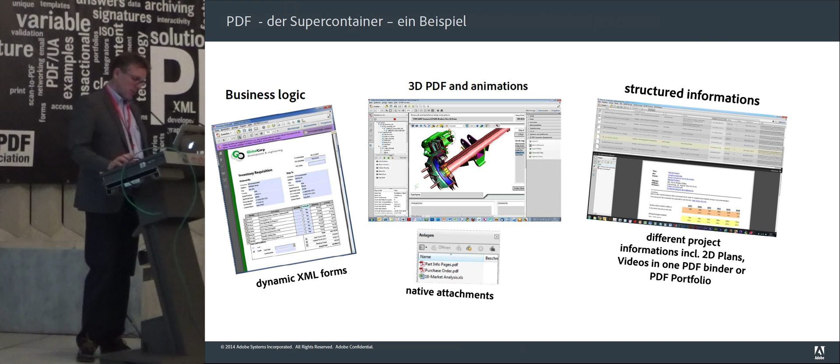So I would like to show you, just as a beginning, this example as a real example. So let me go into my demo file, and there you can see, for example, that this was the wrong viewer. I open that with Acrobat, and there you can see that this is a portfolio, and this portfolio has been created in Outlook. So you can just go down here and you see this email, which was the original email.

Then it includes, of course, it's from me, and it's to Peter Körner, and so on. You can click on that, and it opens automatically the email client. It also includes an attachment, and you can sort this portfolio, which you can see here, like you can do it with Outlook or with Lotus Notes.

You can see where it's from. The file structure is in there. You can see from whom it is, and you can see also that it has some attachments. So for example, there's an attachment which includes an Excel data sheet, and if you double click on that, it automatically has the same Excel sheet that it was when it was an email.

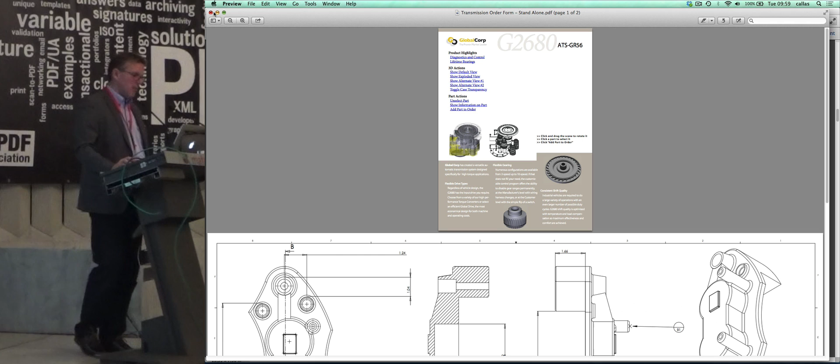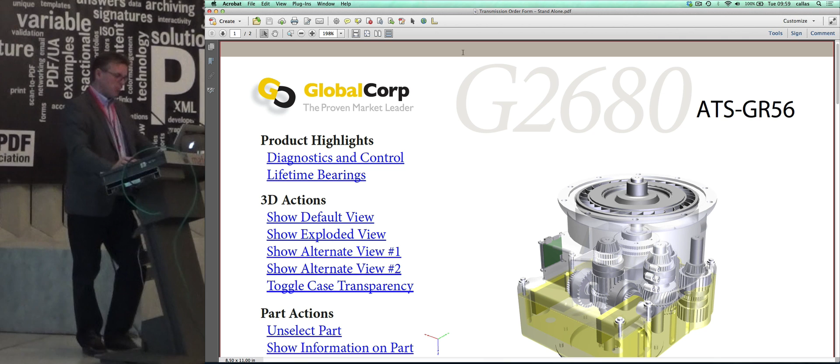The other one, which you can see here on the left side, I can show you as well. So let's go here, and I would like to open that. And this is a file which is one PDF file, and here with preview, I have to open that with Acrobat again. Sorry about that. So you can see that is a 2-page document. It has a 2D drawing, and on the left side it has a 3D picture, and it has a 3D model. So if I click in here, you have the 3D model.

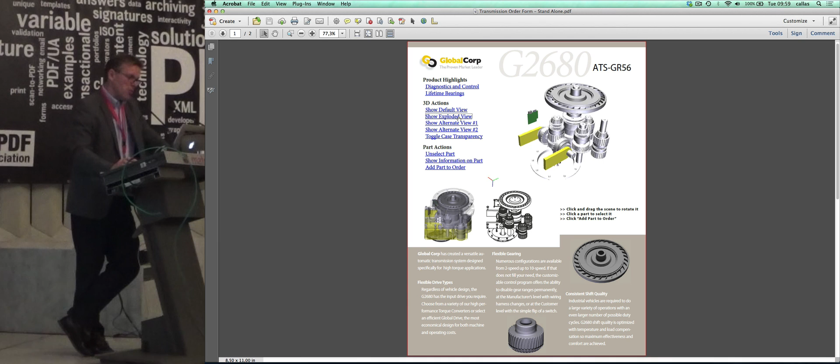But this is not only to turn and zoom and so on. It has automatic connections to some buttons, which drive the 3D model. So for example, I can show the exploded view, and there's an animation inside this 3D PDF file. You can also go in the Reader and have it available as a CAD viewer. Just with the mouse button full screen, you have a complete 3D viewer with the normal free Adobe Reader.

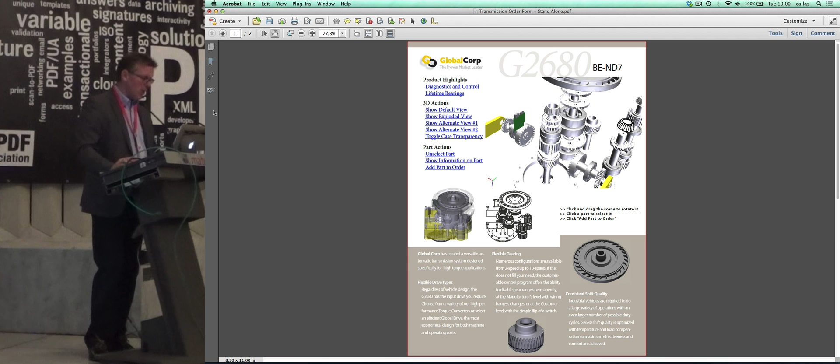If you click on one part, for example here, you can see on the upper right corner that this part number changes. So all parts have different numbers. So where does this information come from? That's very easy. It comes from the 3D model. And you can, of course, have a look at the 3D model if you just click here.

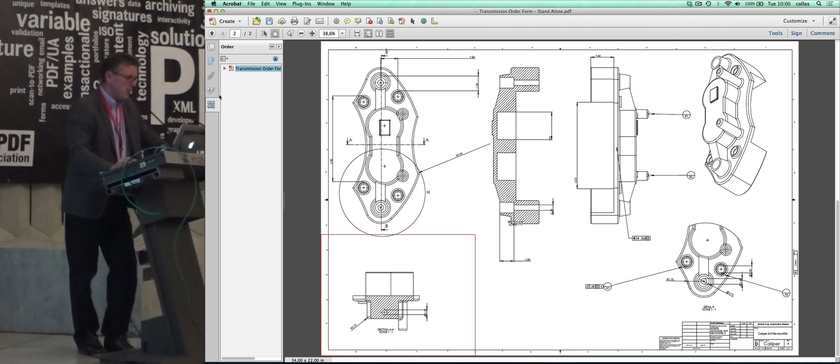And you can see that in this, oh sorry, that was wrong. It's so small here that I was clicking the wrong button. So the 3D model is inside here, and the 3D model has, of course, some views which are controlled from here. So that's very easy to show. And the views are stored inside this file and can be driven by those buttons.

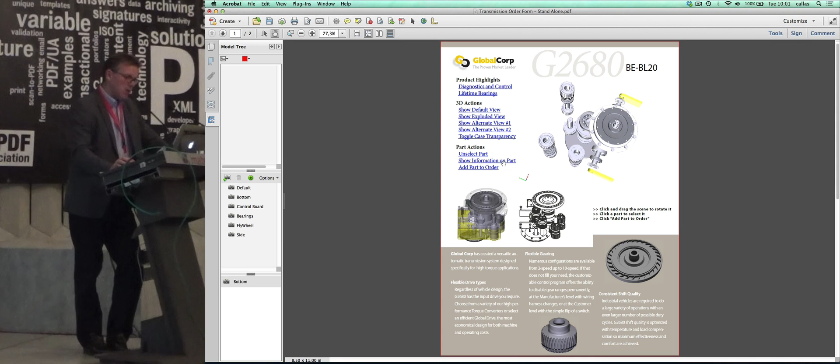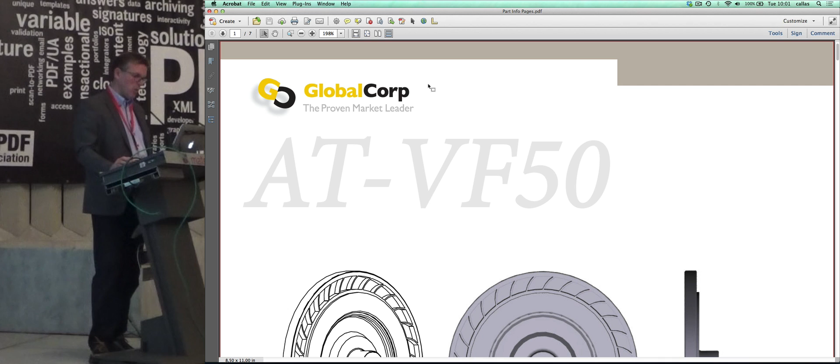So let me, for example, click on one part and show the information on the part. So you have a data sheet connected to this 3D model inside the same PDF. If you click on the attachments, you see that there are 2 PDFs which have the part catalog, and it automatically knows when I go on, for example, this other part here, and I say, okay, show me the information on that one, that it has to pull the right page from this other document. So that's very straightforward, but it goes a little bit further.

So if you say, okay, this part, for example, that's broken, and I'm a service engineer, I have to order that from the stock. So you just click on that part, you say, okay, please add that part to my order. So what happens is, if I click on this one here, it automatically opens an XFA form.

And if you put those next to each other, then you can see very easy what happens.

I don't know what's going on here. Certificate revocation. Okay, there's something wrong with the internet connection here. Okay.

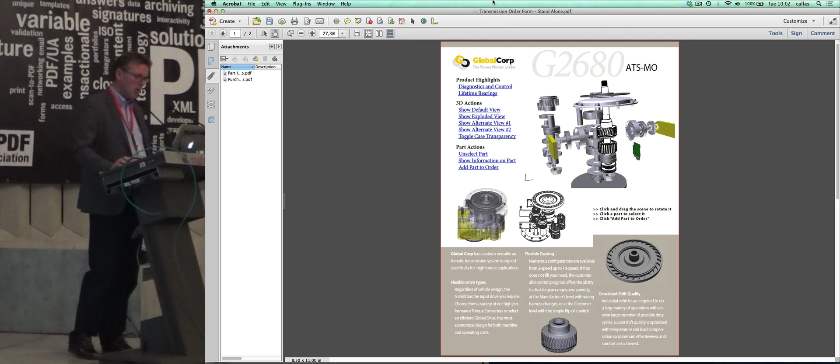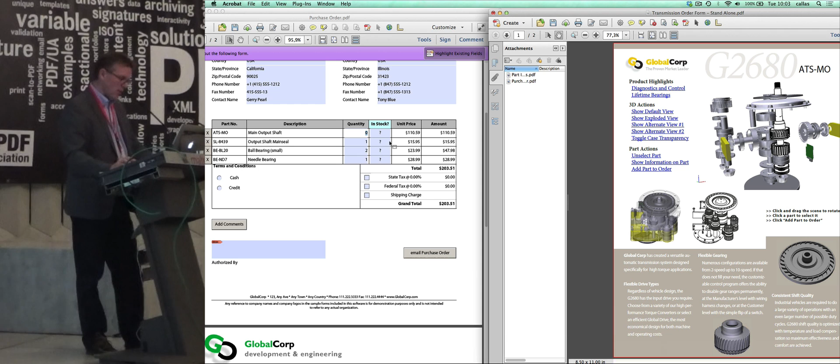So let me do that a little bit smaller. And now on the left side you see the XFA form, and on the right side you see the 3D model. And there's a JavaScript between those 2 PDFs. So if I click on that part and I want to order that as well, I just click here and you see what happens here in this table on the left side. It automatically grows and adds this part to the list.

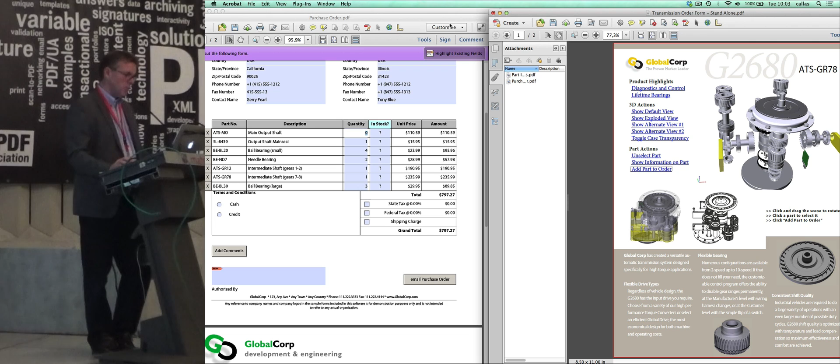So that can be done with JavaScript. It's a very easy script and can be used as a template. And as I said before, this is a dynamic XFA form, so you can easily purge out, for example, this one. And you can have a web service connected to this XFA form, which goes to SAP and has a look, is the part on stock, yes or no?

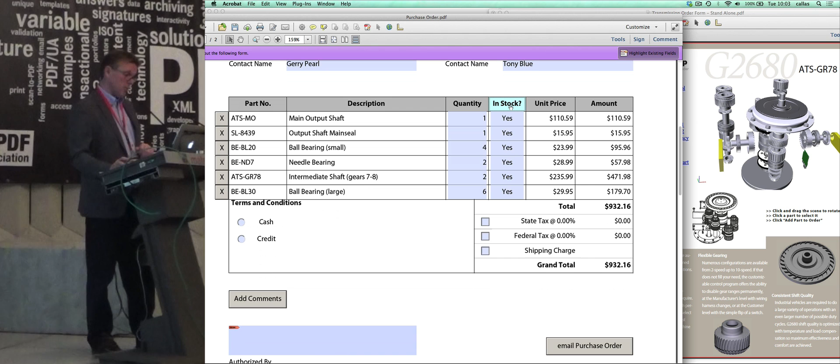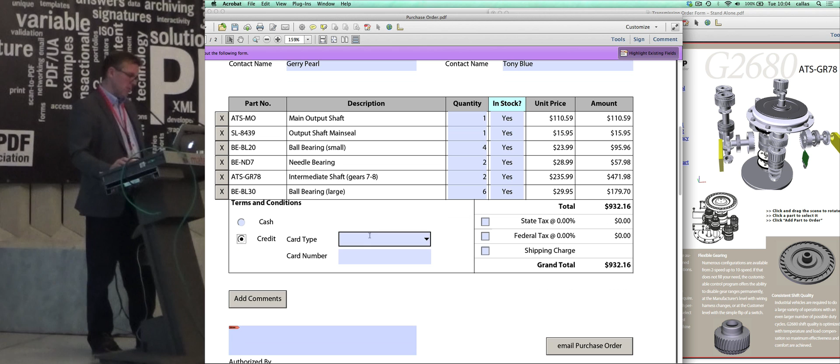So you just click here and it goes through the web service, asks, is that valid, yes or no? And then it brings back the right yes. And also dynamic means if I click on credit card, this field pops up, which was not there before. Then you can sign it with a digital signature, and then you can just click on that button and you have an XML file attached to your email, which goes to the manufacturer and orders this part.

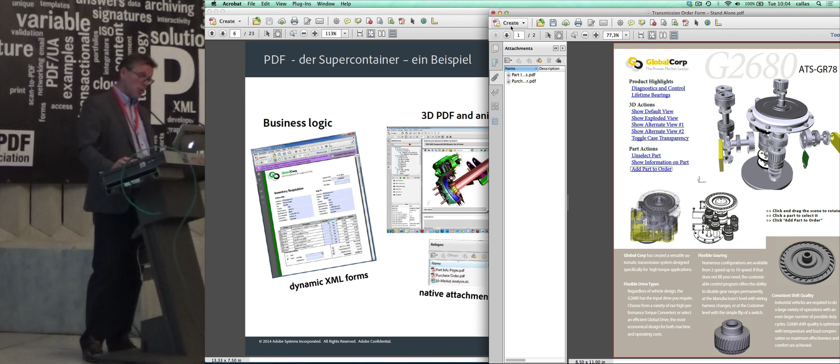So that's a workflow for PDF, which is non-flat, which has JavaScript, which has 3D, which includes also an XFA form. So let me continue with the next slide. So what you have seen was the left one. That was an XFA form. I have a little bit more on that one.

What I wanted to show you is in Acrobat the ability to create an AcroForm from a normal paper. So for that I have also an example which I would like to show you, and that's this example. So that's a form. I hate preview. That's a form, and this form I want to just convert into a fillable form. So in the moment, nothing. That's the typical scenario. You can't fill out anything.

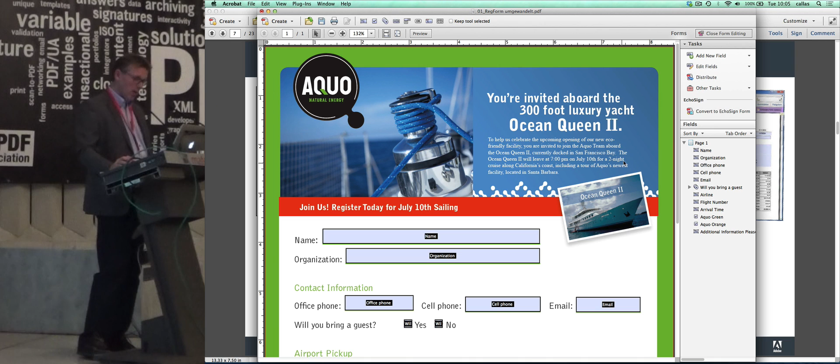We have a technology built into Acrobat Standard and Acrobat Pro where you can just say, please create a form from the existing document, and then it automatically converts all the fields into AcroForm fields. So those AcroForm fields can be modified, for example, accessibility. You can move around the fields in which order they have to be. If you want to delete something or if you want to modify that, you can just go there or place a new field, for example, a text field somewhere which you want to have here.

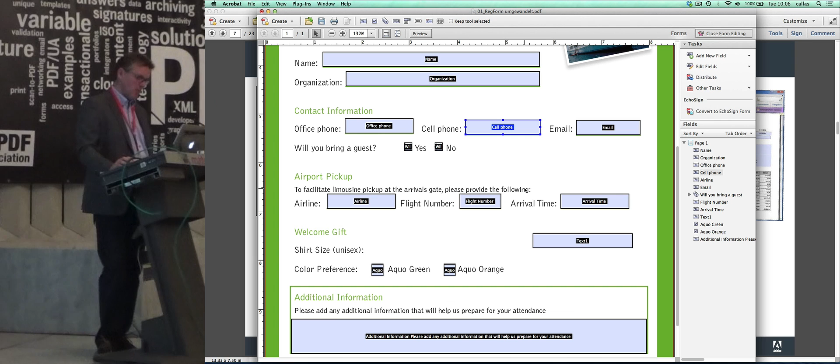And with a double click, for example, on that one, you go inside the form field and you can modify all the different values. You can even put JavaScript inside here, so there's calculation possible, and of course you can say, okay, please check the values of this field when somebody enters a number or so. With preview, you go in and you have your form ready, which you can just fill out, very easy. But that is not the end of the story.

Now you need to collect the data from the customer. So what happens is you can say, okay, I go here and say I want to distribute that. So normally you just save that again, and you say, okay, I want to replace that, and then you can say go, for example, to a server, which can be SharePoint, which can be web server or whatever, and then you can just fill out this field, send it, and the customer gets this form, sends it back, and with Acrobat you can collect that again.

So that was what I just showed you, the creation. The distribution I will skip because you can believe me that that works. And I would like to show you what comes back from the customer and how you can really easily use it and convert it into Excel.

So if you click on this form, you can see that this is a portfolio again. So it's a super container of a PDF, which includes a lot of other PDFs. And those PDFs, as you have seen before with emails, those are the filled out forms. So very easy, you can have a preview on those forms. If I look at that, you can see what each of those guys has filled out.

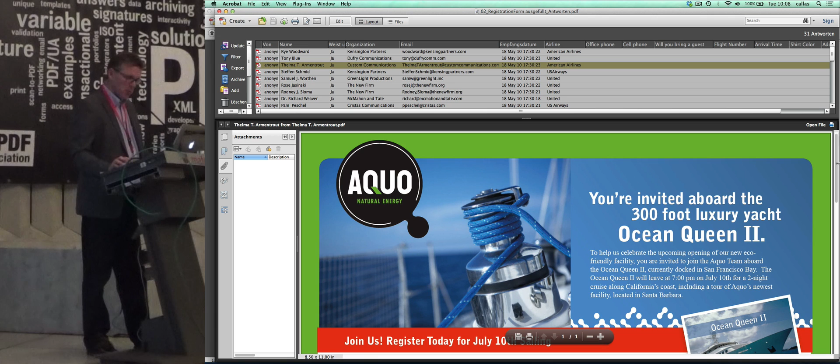So now this is a collection of the answers which were coming back automatically on the server, and you can just say, okay, please export that into a CSV or into an XML file. And the result is then an Excel or a database. So that's a very, very easy, straightforward form process which is built into every Acrobat and what people can do.

With the XFA forms, I would like to show you an example of what concept is behind that. So with XFA, you have, for example, a file called address. This XML file comes from somewhere, could be whatever application. You have that XML file, and you have an editor called LiveCycle Designer, that's an XML editor for LiveCycle forms or XFA forms. You just drag and drop it there, and it is automatically shown like that.

So if I open that in Reader or in Acrobat, it comes like this, and I included also a 2D barcode. And this is also something which is built in as a technology in Reader and in Acrobat, and most other viewers in the meanwhile can also do that. But I want to show you what happens here.

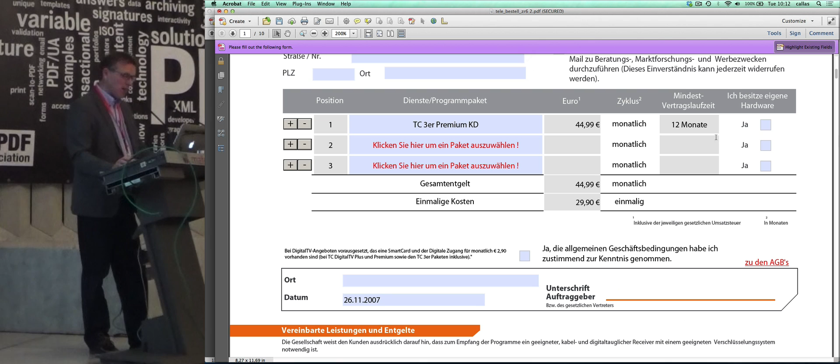Dynamic means also I have hardware already. So if I click here, it pops up a different field which was not there before. So if I click on that field, you can see that. And the nice thing about it is this reacts to all the inputs from the users.

So if you click in there, the business logic automatically gives you the right values, and you can't do anything wrong with this format. It will always remind you, please fill that out because you forgot this field, or this can't be, you have to adjust this and this.

And those XFA forms are heavily used in the industry. A lot of banks, a lot of insurance companies are using that because, of course, you can't do anything wrong, and you have always the right data.

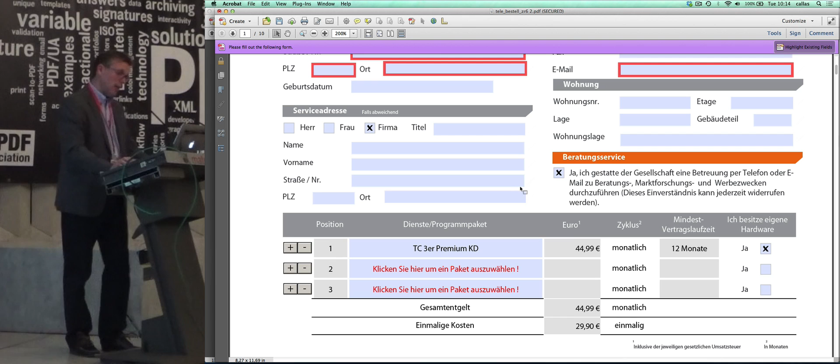Now the question comes, if I put everything offline in this form, what happens if anything changes? There are two possibilities. The first thing is you connect it to a digital rights management server, and next time the customer clicks on the form, even if it's offline, there will pop up a menu, please download the new version. Or you put all the values which are changeable into a web service and reload that from the web service into this form. So that's very powerful, and a lot of customers are using that. That's called XFA, and yeah, you have just seen some examples.

So what happens when you want to archive those forms? Well, they can't be dynamic, they can't include JavaScript, that's not allowed in PDF-A, even in PDF-A3. So what you have to do is flatten that. That means you fill it out with the right values, and then there are possibilities in Acrobat, or other tools as well, where you can flatten that PDF and it will be an archive version of this form. It can't be filled out anymore, but it includes all the values.

So what I've just shown you is an example of that, and it can be connected to different systems. For example, the SAP dynamic form could also be connected to other databases, to a CRM system. You can include a digital signature, you can include a barcode, you've just seen that as well. All those levels - the presentation level, the business logic, and the XML file - are in the same PDF. The XML can be pulled out of the PDF, or you can just say the PDF stays at the customer, and he just sends me the XML file back. That's just how it works. You can see here that all those fields can be linked together in form fields, and you can really combine that with web services and have a real intelligent format.

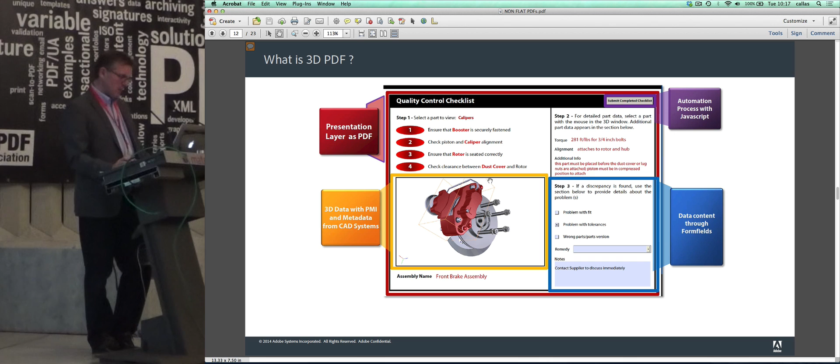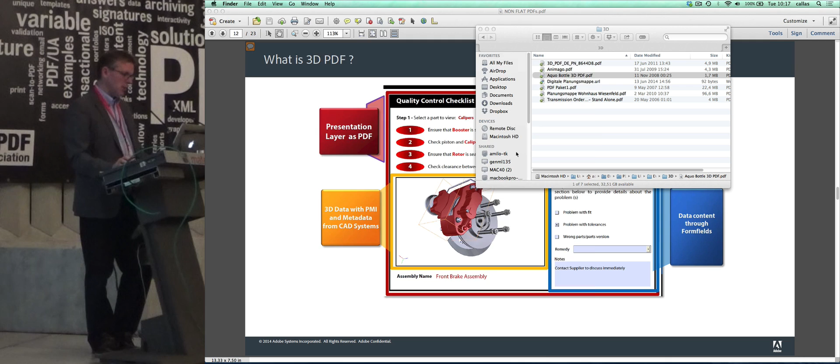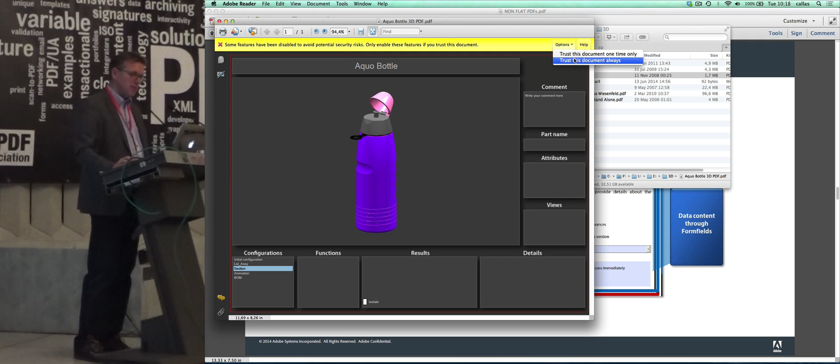So let's have a look. I brought also some examples here, and the first example which I would like to show you is an intelligent one. So I open that, and maybe I don't open that with Acrobat, I can open that with Reader. Have a look - when I open that with Reader, it works in Reader as well. It's a free reader, and I can trust this document, and then it works.

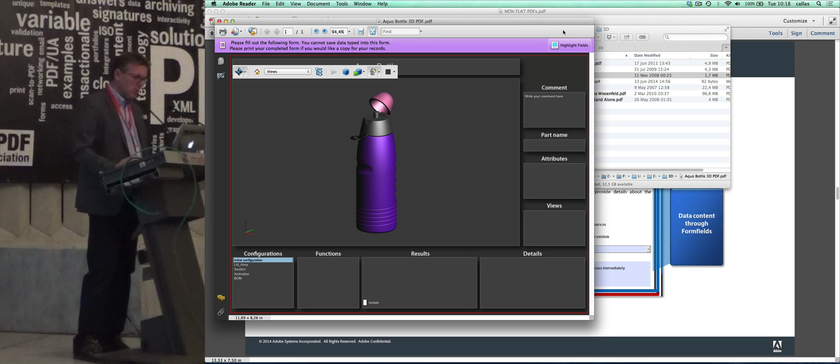So you can click in here. When you click in here, this 3D window, which was just a picture on top of it, releases the 3D model, and the model can be turned now, and you have a menu bar on top of that, which can of course steer different things inside this model. For example, you can open the structure tree, switch the background into a light background, have different views, home views, or drive that from a different angle. So I don't know, Reader does not want me to work, so I close that.

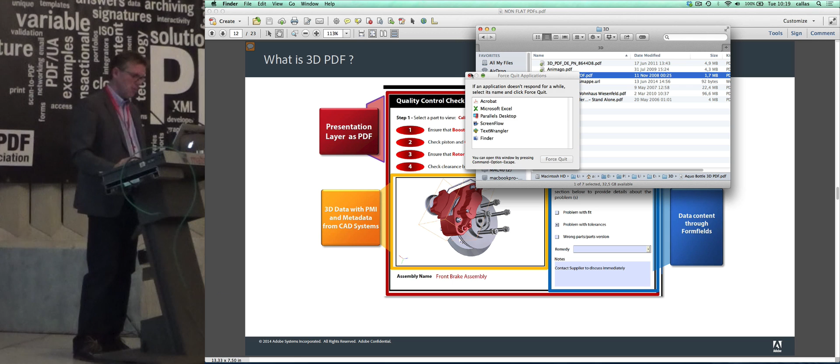Okay, I closed it, and I opened that with Acrobat, but in Reader it works. Believe me, a lot of customers are trusting that, and that works quite well.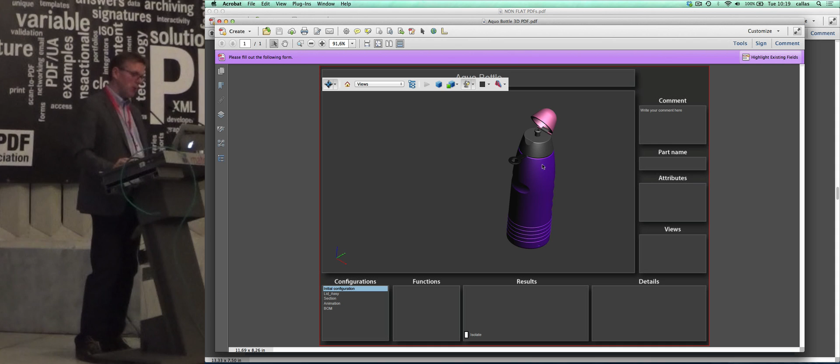So what you see here is this bottle, and I can turn that with the left mouse. With the right mouse you can zoom, and with both mouse buttons you can pan. So it's very easy to use. Background, for example, you can change here into a white background, but I leave it as a dark background because in this model there are some more things which 3D can contain.

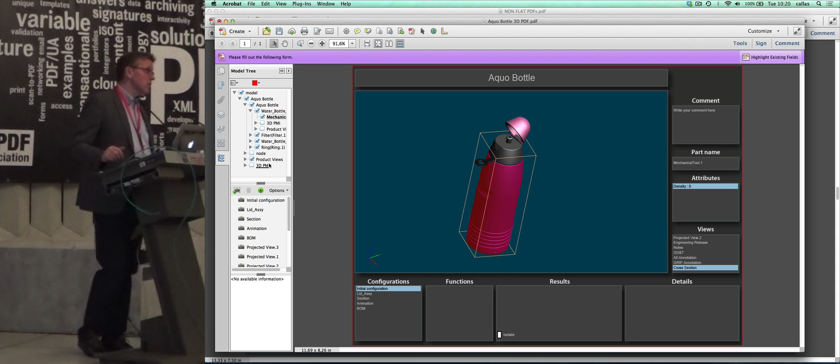So let me switch on the structure tree, and you can see this is an original CATIA assembly from CATIA V5. There is a tool called Tetra 4D PDF converter available, costs 500 euros, very cheap, where you can convert 40 different formats with just drag and drop, without having the CAD system on the desktop, into a 3D PDF. There's also a server version available for that from ProStep, and you can really easily do a workflow in the company. So when you look at that structure tree, you can see that all the parts are turned on here.

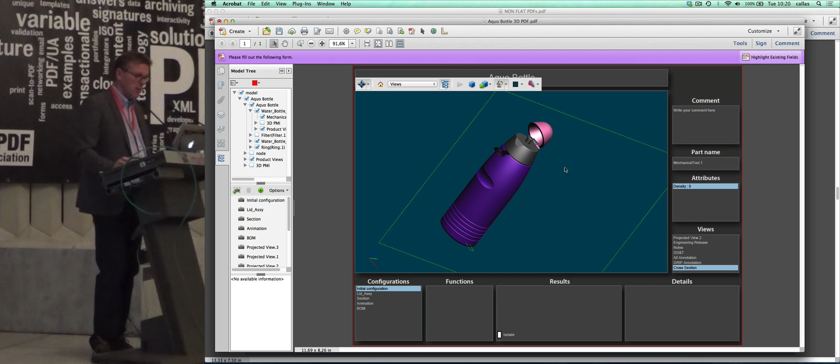So you can turn on different parts which you want to see or which you don't want to see on the left side, or you can just go here and say I want to just highlight this part and isolate it, and I have only the top part.

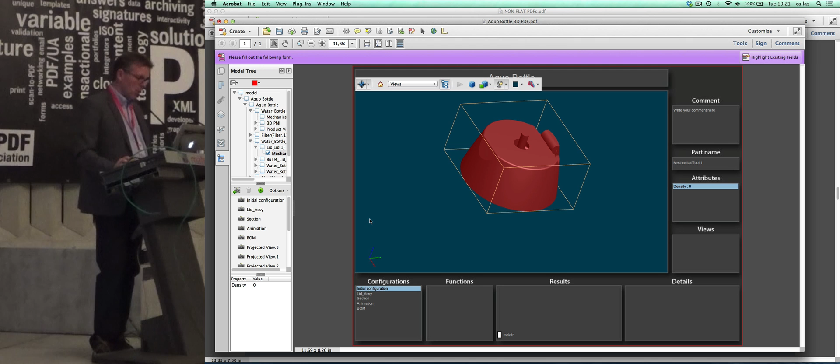What you also see on this model is that you have these configurations, these different views, and the different views can include different things. For example, I have a cut section, that's a view which I just stored. Just click on this plus, create view, and you have a new view. Very easy, and you can still navigate around it.

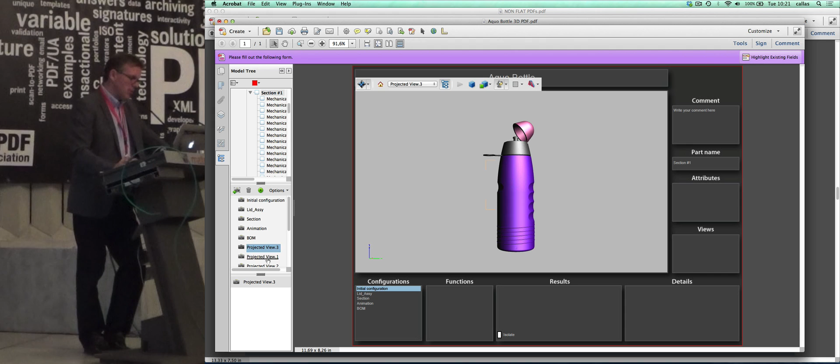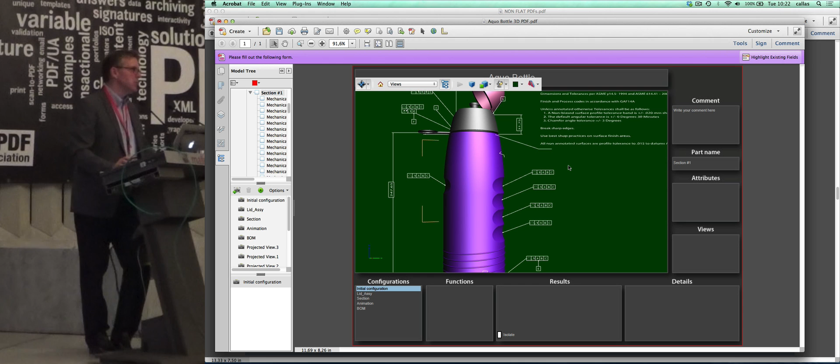You have different views stored here, and this view, which you can see better in the dark background, includes PMI data. PMI, that's called product manufacturing information, from CATIA or from other systems like Creo or NX or whatever. You have dimensioning and tolerances which are not as a 2D drawing, but included in the 3D model, and 3D PDF can include that, and the PRC format, used here as a very precise BREP model, can include that PMI data.

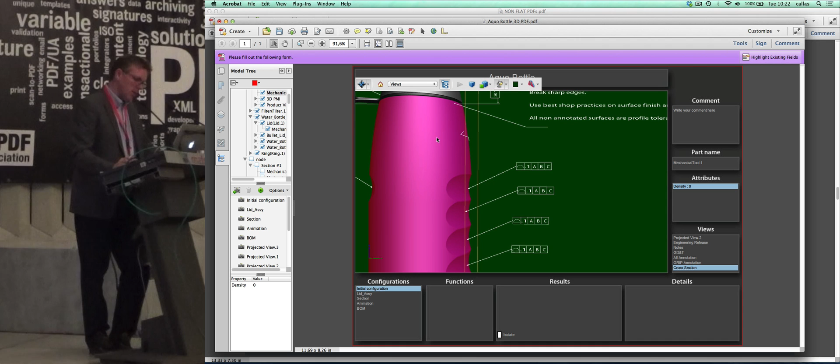So what I would like to show you as well is that not only PMI is possible, but you can click on a part like this bottle, and here in the rest of the PDF - maybe I do it larger so it's better visible - you can see that these are form fields. A form field can, for example, show the different views. So I can just click in this form field and they come here as well.

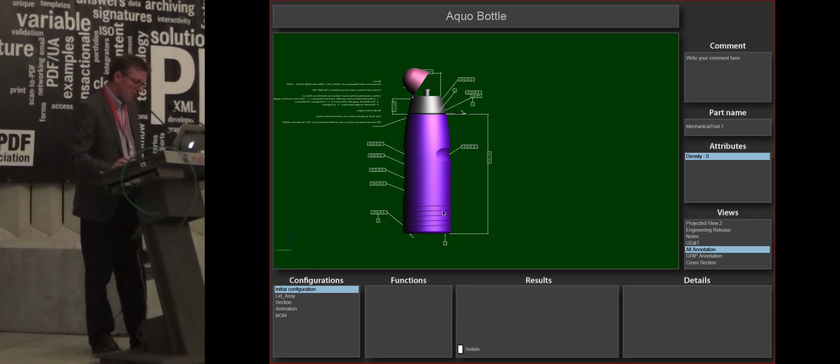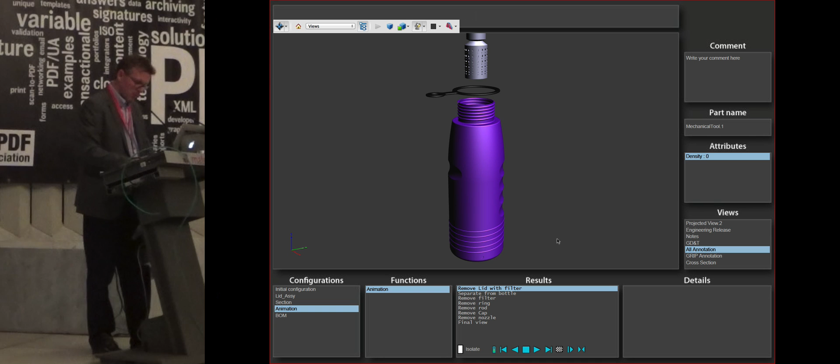If I look at that, different configurations have been done, including an animation. So for example, if you want to start the animation, you go here - this is Cologne - type in this form field, you can start the animation, and you can see each step is listed here.

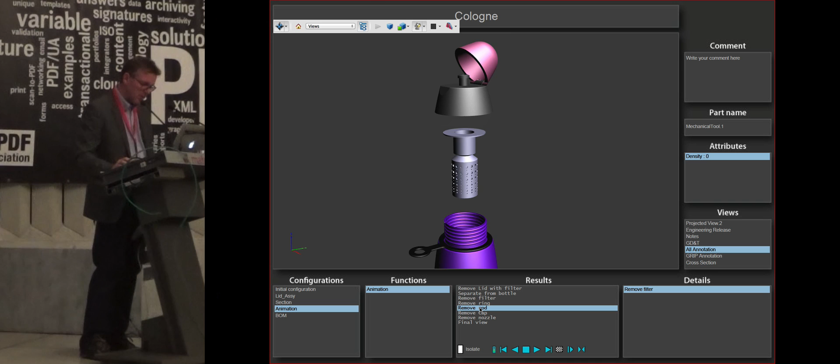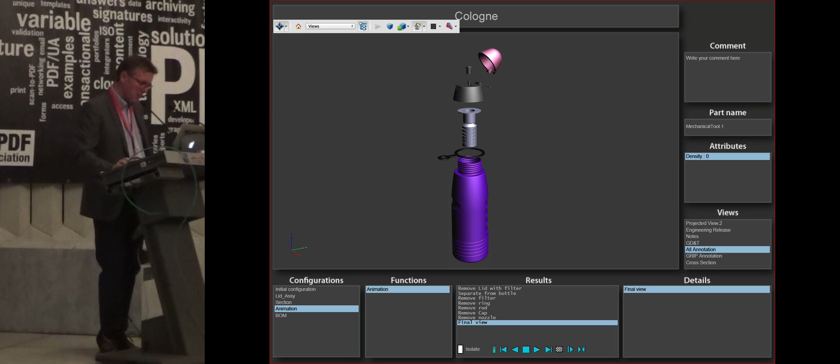And once the animation has finished, you can even click on the different parts and highlight those. So for example, show me this animation step to remove the rod or to remove the ring - those are different animation steps. And if I say okay, I want to click on a different part in this animation, you can do that. So it's very, very powerful.

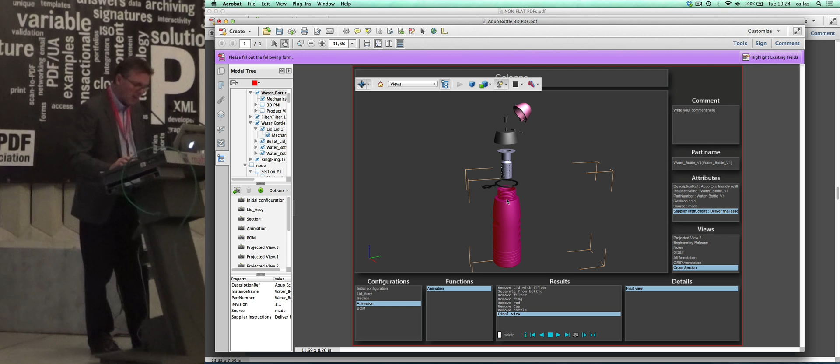On the right side, you can see the details from this model, attributes, so even metadata from this CAD system comes across. So if I look at the bottle and click two times, I zoom a little bit deeper here. You can see that on the right side - you have now the attributes from CATIA V5 inside the 3D PDF. So it's not just a stupid model, it has really intelligent metadata, and they come directly off the CAD system, and you can read that out with JavaScript and fill it into this form field.

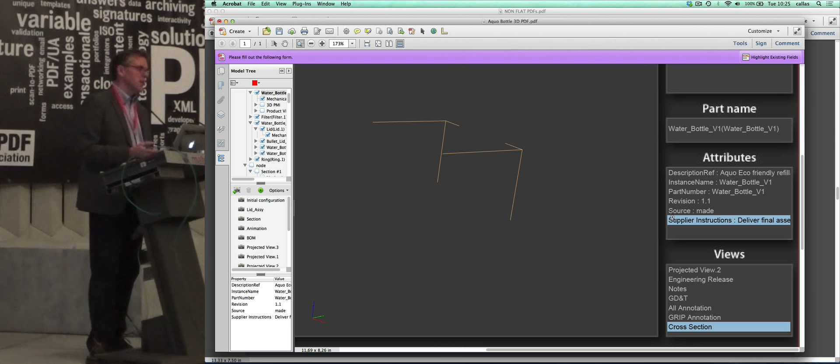So a lot of processes can be automated, and there's no other format which can do that in the engineering world, what we can do with PDF, because it's a document and not just a 3D format. A lot of people throw that in one box and say, well, but we have JT, and JT can do animation, and JT can do this and that. Yes, that's true, but JT is not a document. So there's a lot of discussion, and Mr. Wächter can sing a song on that, but companies who have used this in their processes are really delighted because it's very powerful. Large companies like Boeing, Airbus, BMW, Volkswagen and so on use 3D PDF very heavily for different processes and save a lot of money.

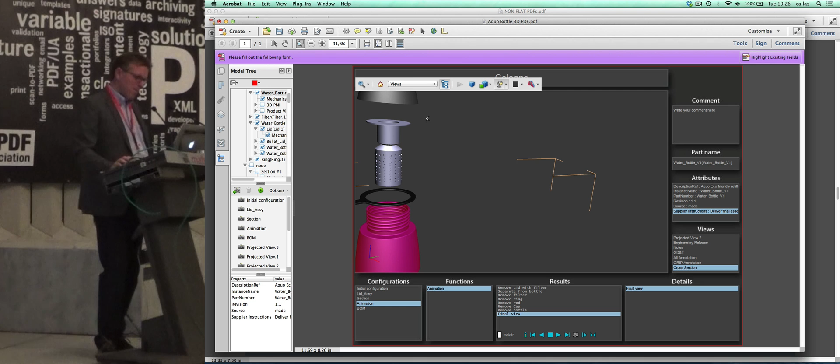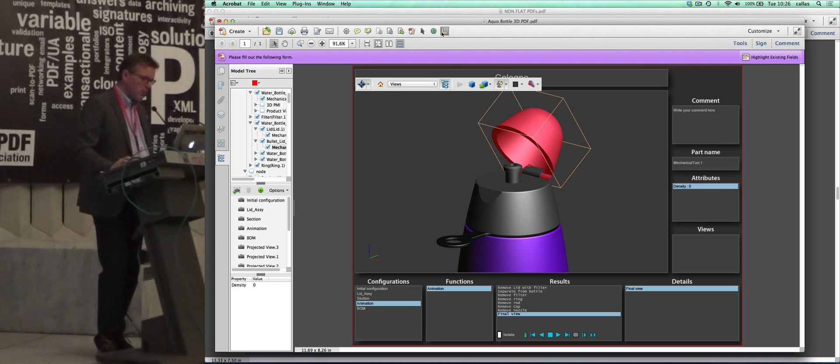Also, annotation is possible and measurement is possible. So if I go here, for example, on the initial configuration and click on the measurement, you can see that there is a possibility. I zoom in a little bit, sorry, that's a bit far away. So you can, for example, see what is the distance from this point to this point, and that can be stored in the file.

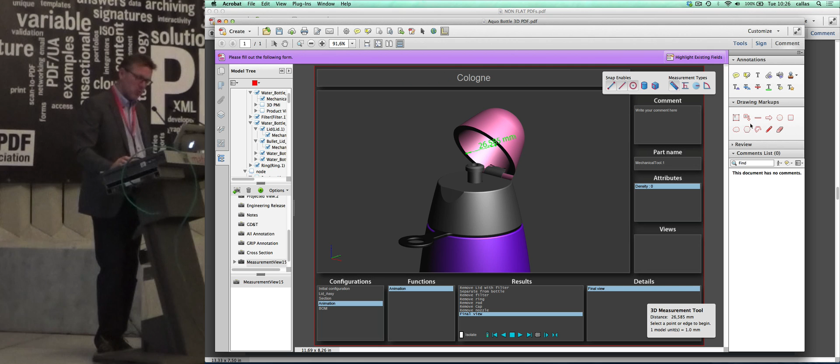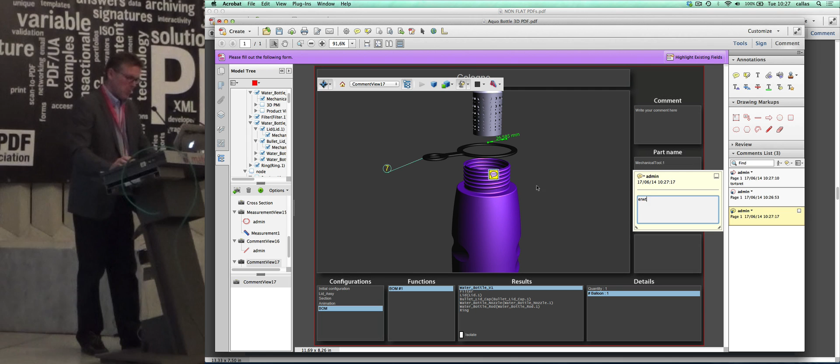Also, comments can be stored in a 3D model, like those comments available in the reader. We have not only text comments, but also redlining capabilities - for example, this one. So you can just circle this part, then go out and say I want a different view, like the section view. I do another comment here, and in the bill of material view, for example, I'd like to have another comment, and I drew just a sticky note on that. So what happens is Acrobat Reader remembers exactly which view I had when I was doing the comment.

So that's very powerful, because then you can comment also 3D models with a free Adobe Reader, having that as a CAD viewer available, with all the metadata, all the structures, and if you have Acrobat available, you can even export that into different formats like JT.

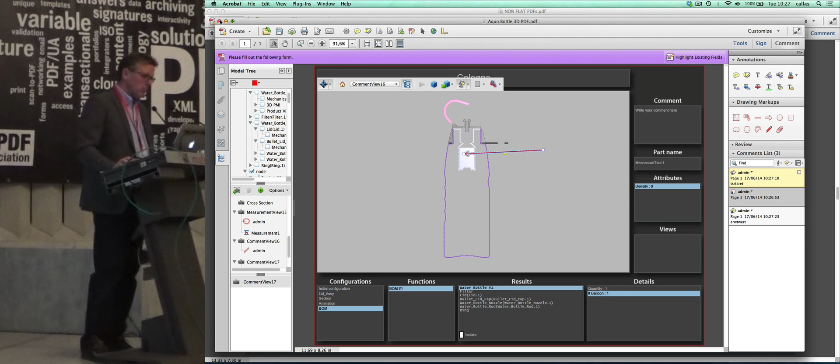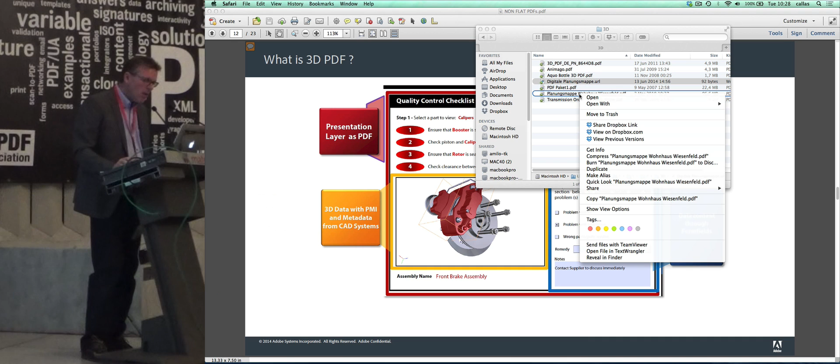Okay, that's one example out of the manufacturing space. I would like to show you an example which is an architecture example. So this is an expose from a house, and it uses a lot of interactive functionality from PDF. So if you click on this one here, you can see that it includes different views and different layers. So in this drawing we have a lot of layers which come from a DWG file, from a drawing. And you can put that on a button, so you can say, okay, show it without measurement,

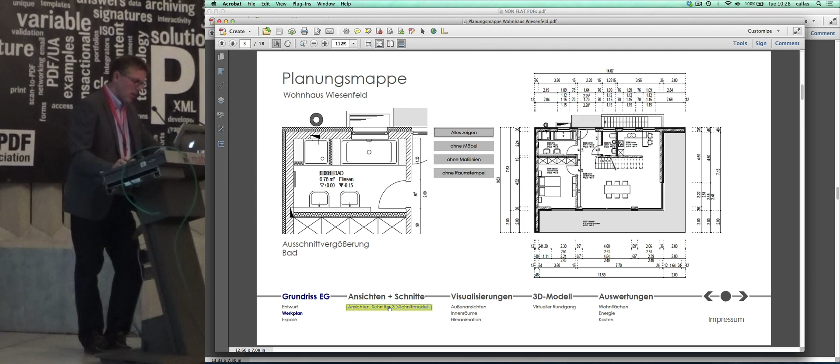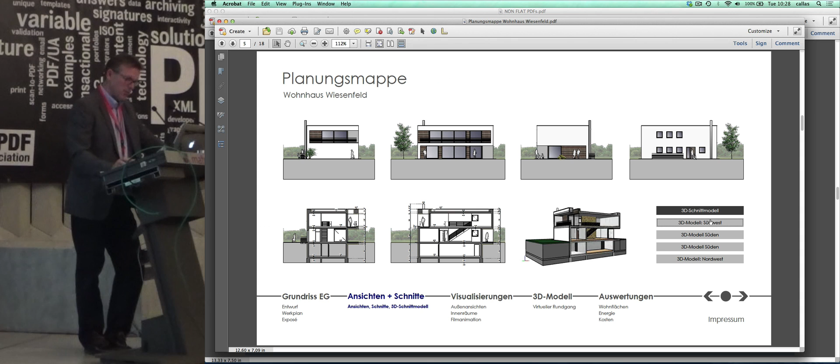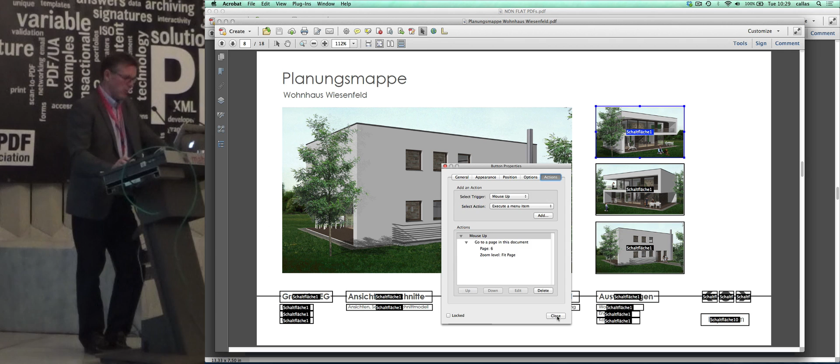show it without stamps, show everything. Then you can see here that there's a 3D model included as well, and you can put the different views here on the different buttons, which I have shown you before. Also, you can say, okay, I want to click on the pictures, and then the picture itself is moving. Everything is done with just interactive buttons, very easy. If you click on those buttons, just double click on that and you see what has been done. So it just says, okay, go to this page and so on. So it's very straightforward to use and very easy and nicely done.

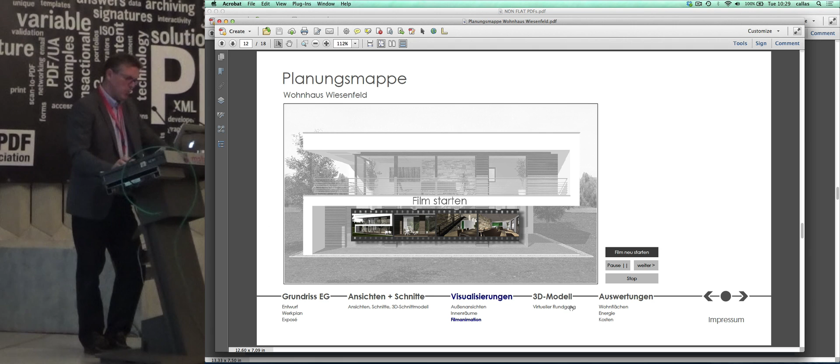Also, you can include a movie like that. So if you click on this movie, it will automatically start a movie, or you can put here a 3D model. So before I have shown that 3D model, and I would like to show you that this is the same thing, the same technology, but this time available as an architecture example.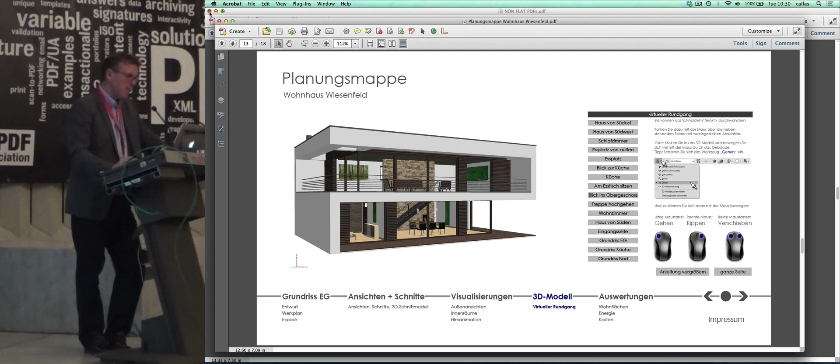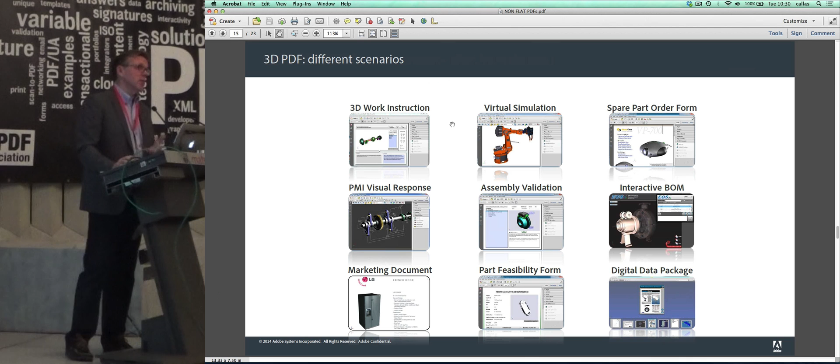Okay, there are a lot of other examples which can be done. I have a lot of stuff on my machine. If somebody is interested, I can show you. There are some processes which can be combined. So security outside the PLM system can be connected to this 3D model. And so you can say, okay, if this document leaves our company outside our firewall, it has to be protected and all the intellectual property data has to be secured. And that can be easily done with a very intelligent PDF container, which I have shown you before.

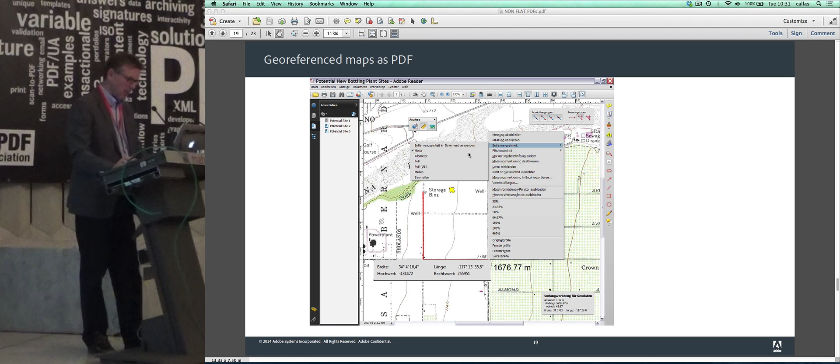So the last thing which I would like to show you is a thing called georeferenced PDF. Georeferencing was introduced when Acrobat 9 was on the market, and that technology was originally from the company called Esri, and this geo engine is now included in every free Reader and also in Acrobat. So I show you an example on that as well, because there are a lot of things which you can do with this and a lot of workflows.

So if I click here, for example, with the right mouse button, I say mark the location, it automatically puts the comment with the right latitude and longitude. You can copy paste that into Google Maps and then you are automatically at the right place in Google Maps. Also what you can do is you can measure in the real world coordinate system called WGS 84. That's what you have in your navigation system in your car.

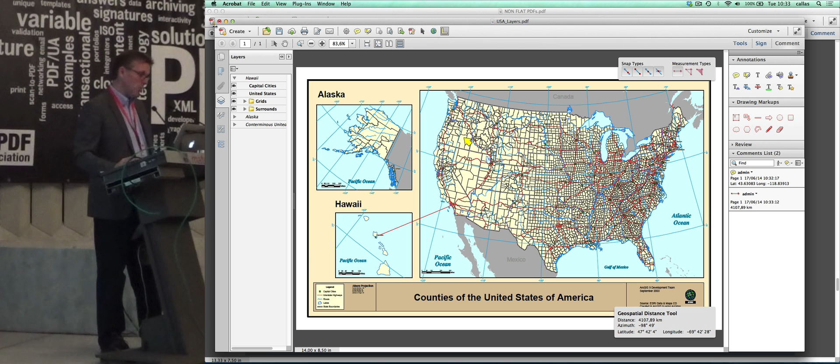You can, for example, measure the distance from, let's say, Los Angeles. And normally, you see, this is the kilometer, 530. If I go to Hawaii, it is not 600, it automatically jumps to 4,000 kilometers because this is georeferenced. That means you have the real world coordinates, and those comments, 4,107, are stored here as a comment, and you can, for example, answer to this comment. That's interesting for companies who have maps with city data and also, for example, data which has property data on it.

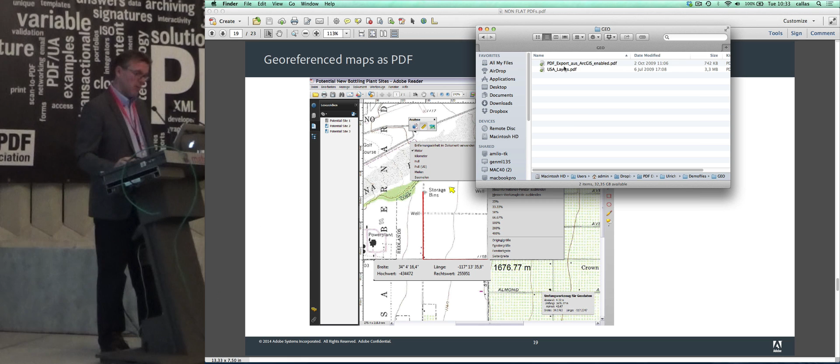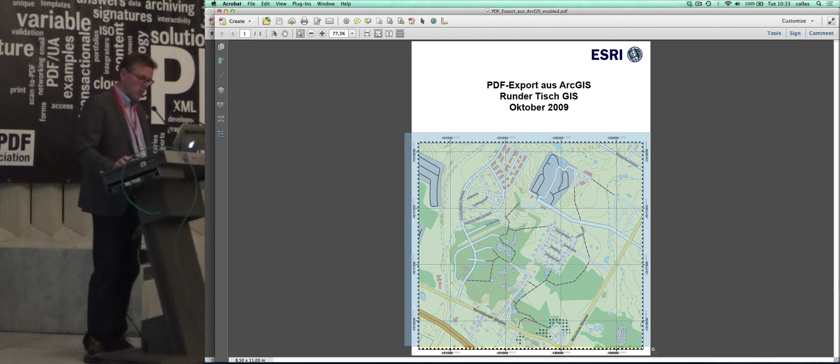So that's the last thing I want to show. I think my time is over now, and that's an example from the company called Esri. That's also a georeferenced example, and I would like to show you in this example that next to the coordinates and next to the possibility to measure real data, for example, you see that this is 540 meters, you have also object data in this file.

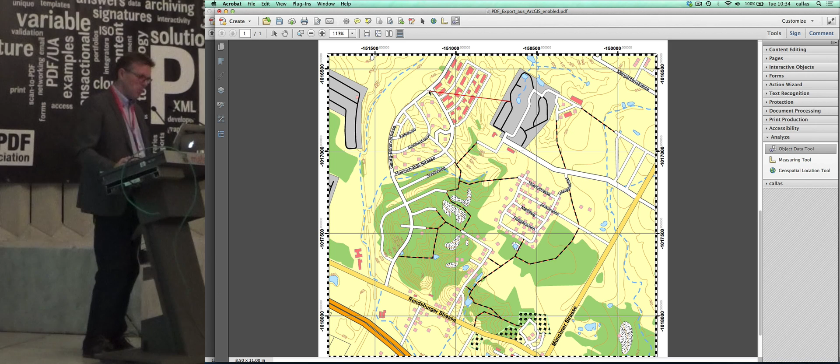And object data are really interesting. You can see that here, and you say object data, please add that to the toolbar. And then you click on a building, for example, on this one here. So what happens, inside the PDF structure, it's possible to store metadata which are not visible here, and say, for example, please show me, and I can make it a little bit bigger, a building with some attributes.

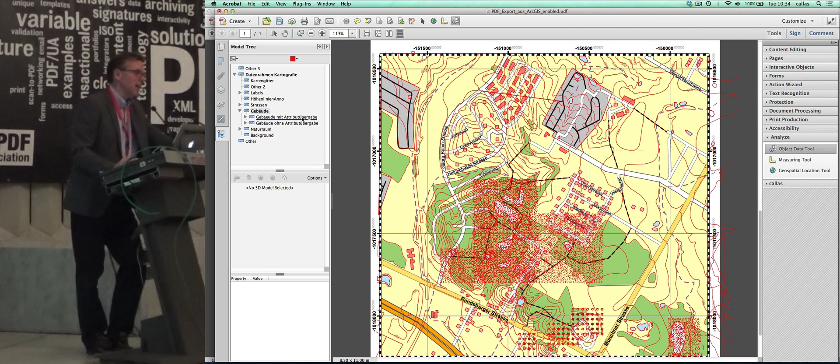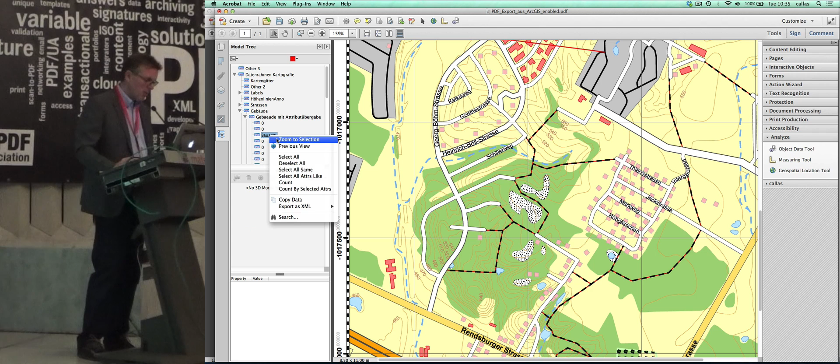And I say, okay, please zoom to the selection. And I say, okay, let's go to the building Bauamt. So if I zoom on Bauamt, it automatically goes here in this drawing and will highlight this building for me. So let's go a little bit closer, go with the cursor and say, please go on the selection. It doesn't work here, I don't know why. Normally it highlights just this selection which I have selected. So it goes directly to a building.

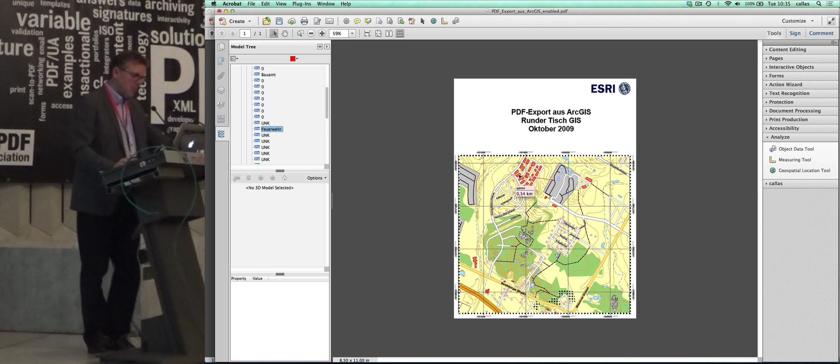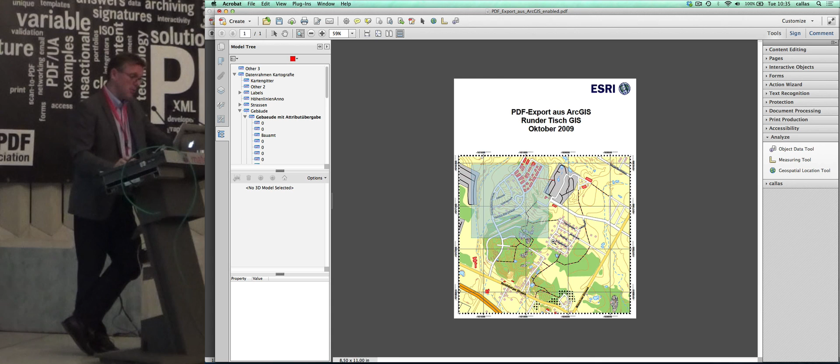And you can see this is a very complex structure from the GIS system, which is exported into a PDF and which stores also the metadata as object data. Okay, so that was a little bit of an overview what's possible. There are a lot more examples available, what's possible with PDF, with interactivity, with JavaScript and so on. But 45 minutes is over, and I hope you have a little bit of an impression what you can do.

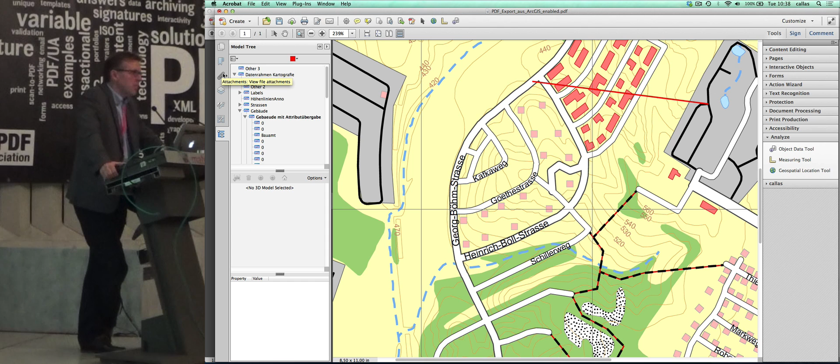Other questions? Yeah. Are there any plans to include JT as a streaming part? We have, or not we, Tetra has included an export for JT in the latest version. So you can export JT out of 3D PDF, you can import JT. The decision why it was U3D and PRC was because at that time JT was proprietary and not an open standard. That has changed. I know that they are talking to each other to do something. I don't know what happens. Maybe there will be some solution, but for the moment it will stay like it is with U3D and PRC.

Can I ask you, I'm not sure right now how 3D models play with PDF/A. They're not part of the PDF/A. Okay, I repeat that question. So the question was how does it work together as an archiving standard? So in the PDF/A line, there will be no 3D. The committee has decided that the archiving of 3D will be included in PDF/E, and with PDF/E-2, which is coming soon, which includes the PRC model, which is a B-rep model, which can be compressed and has precise data, it is possible to do archiving.

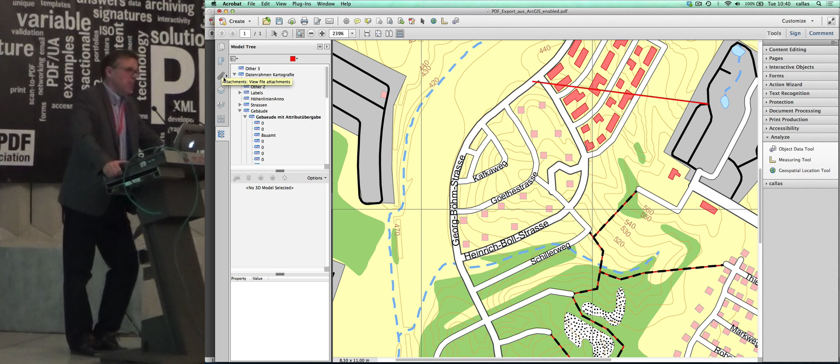And you can even export out of the PDF, for example, in different data files, for example JT, STEP, IGES, Parasolid, STL, whatever. And there's an open API, so you can extend that list. You can export whatever you like. Any other questions? Okay, thanks a lot and have a good rest of the day.